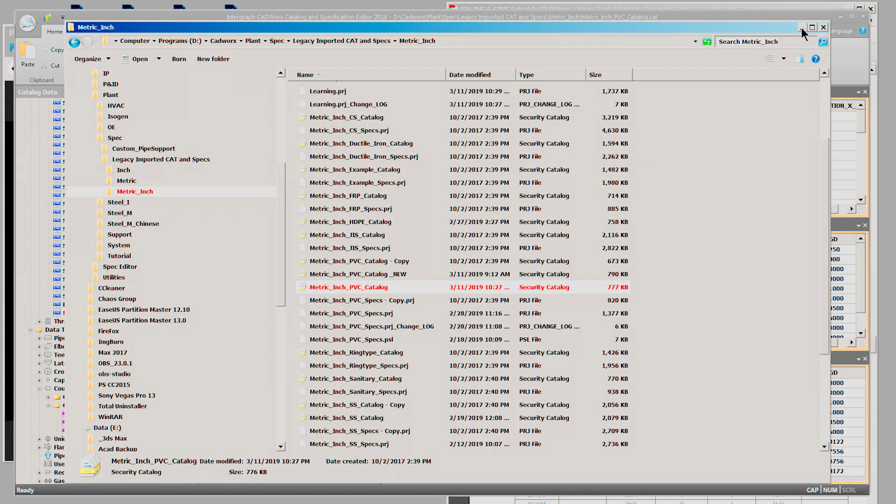Now, what makes this fitting so difficult is you have a start point for the main going one way, you have a start point for the reduction going another way, and between those two start points you have an overlap of pipe.

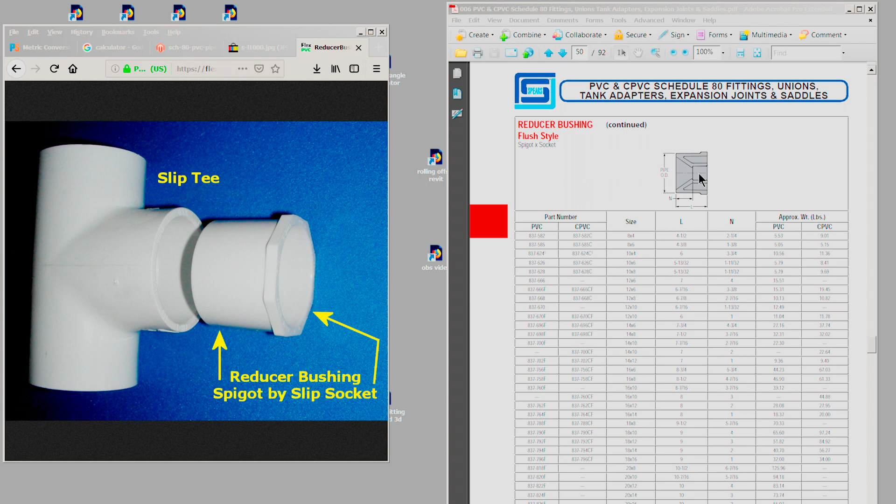Now it works in the model, but when it comes to producing a plot for isogen, you get an overlap pipe error and the plot file comes out all boogered up. So the way we overcome that is by not overlapping the two pipes. I have a small space there.

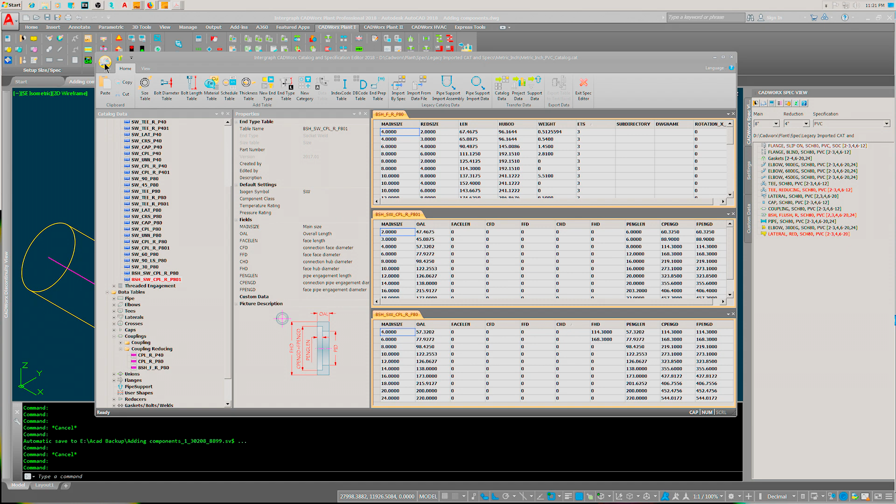So to get started, you open up the files you just made, and you go into the data tables. I use the reducer bushing, copy it, and down here, rename. Now you'll notice the reducer bushing, or the coupler, has two end types. So we're going to take those two end types, one for the main start, one for the reduction, and go up and take those data tables and do the same thing, copy and rename, copy and rename.

When you open up your copied file, you're going to get the original data. Stock Windows commands, pick the top one, hold shift, and remove. To add lines or sizes, right click at the bottom, add size, go through and pick out your sizes. Same with the end type styles.

I've done a diagram to show what to put in these fields to get this fitting to work. Once you've filled in all of the data fields here, you're going to save it and then open up your project spec file.

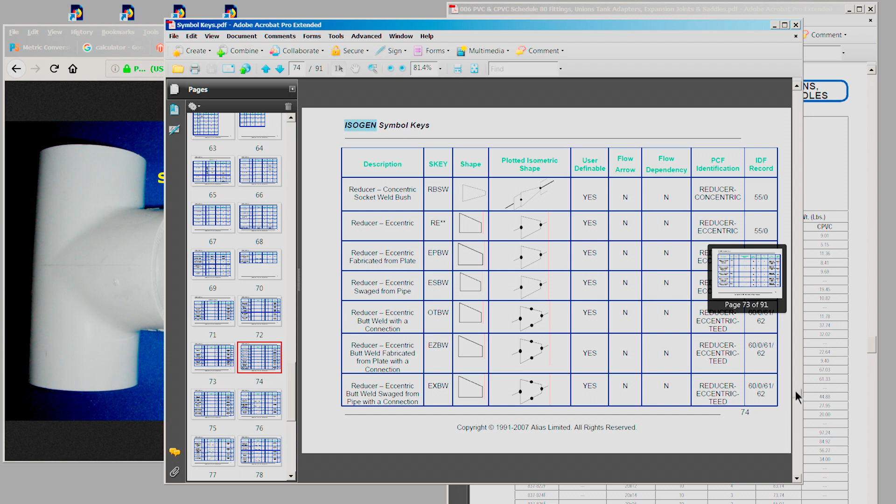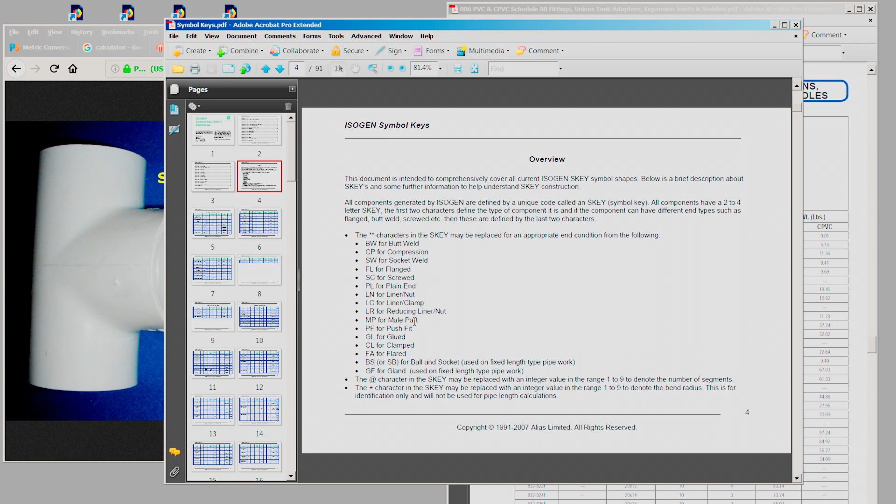On the reducer size, on the end type sizes, I want to bring to your attention, this is the main size. It is not a socket weld. It is a male part. Okay, so that's for the large size, the main size.

The reduction size is a socket weld part. You want to make sure you get those so that your isogen, your symbol, looks like it's supposed to.

Anyway, once we filled all these in, I'm going to fill a data field in here so I can save it out. These data fields have no effect on our part, but it does give me a save.

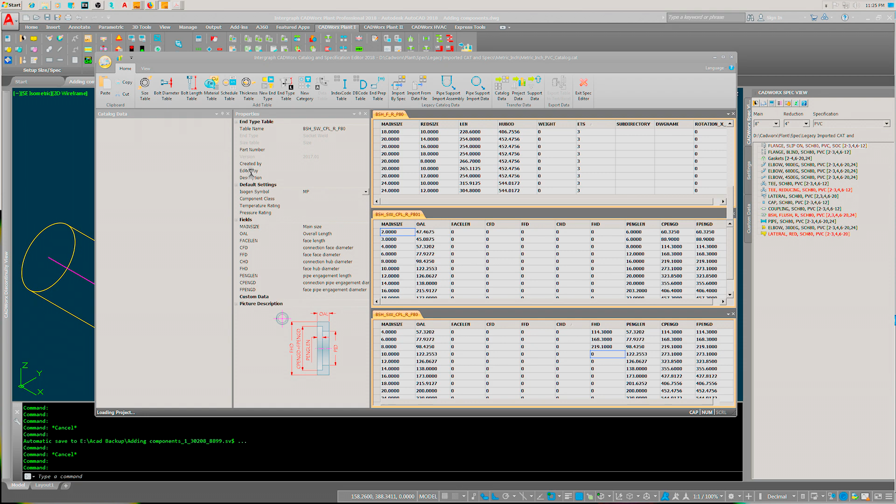So now when I go open the project spec, because I've made changes, it's going to ask me if I want to update the project. Yes.

Now when you first create the fitting, it's going to be under couplings. It's not going to be there. You're going to have to add it. Right click, add, and you come down here and you fill in the fields.

And your data table, that's the one you created for the fitting. Your sizes, if they're not there, go over here and you can select your sizes. And on a side note, I could find no 22-inch Schedule 80 PVC in my research.

Got to do the same for your end types, start and finish. And you notice the isogen symbol there, isogen data that we took from the PDF file.

Add your long and short description. I just kind of copied the format they had for the couplings. And then you've got to hit add and your part will appear.

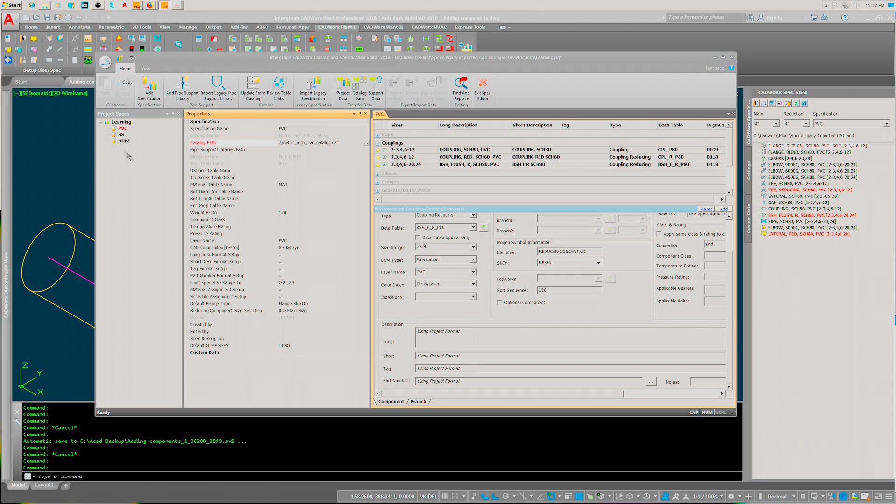When you get all that done, you save it. And then you have to reload it over here, right?

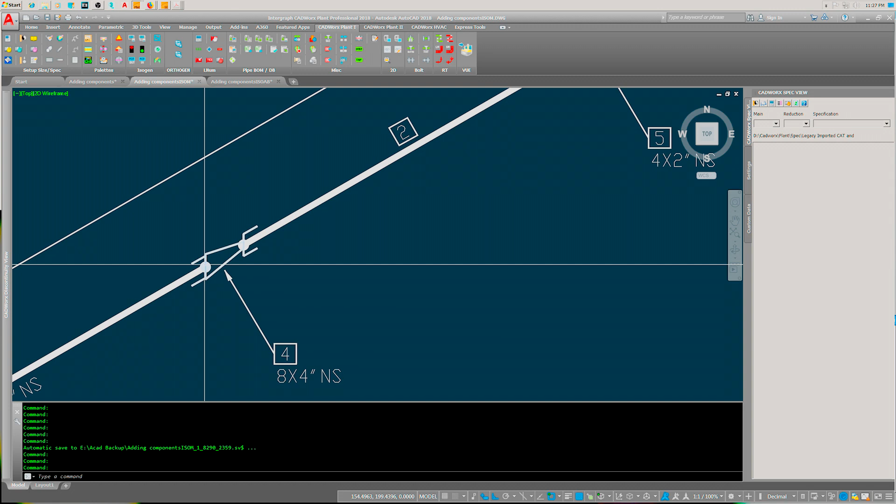Let me show you. This is that fitting done with a socket weld for the main size or the start connection. This is a male part, and this is what we have.

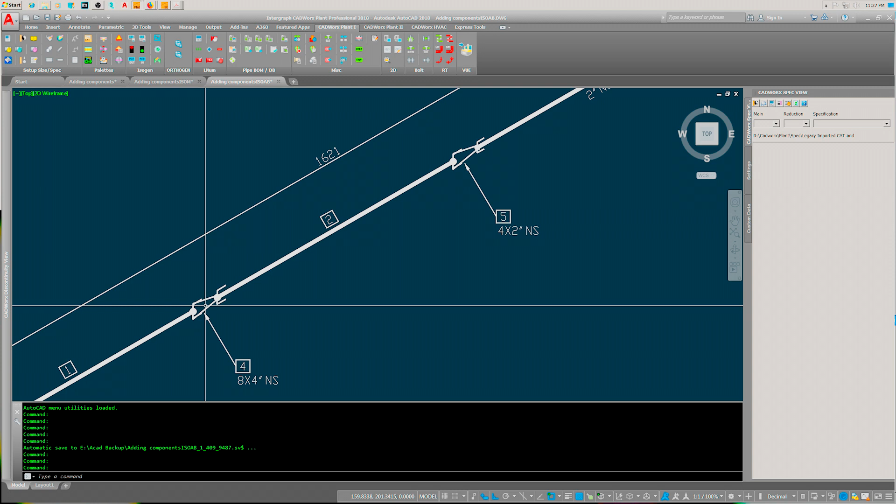We have a bushing fitting inside our main pipe size. That's why it's important to make sure you catch that in the isogen portion of these.

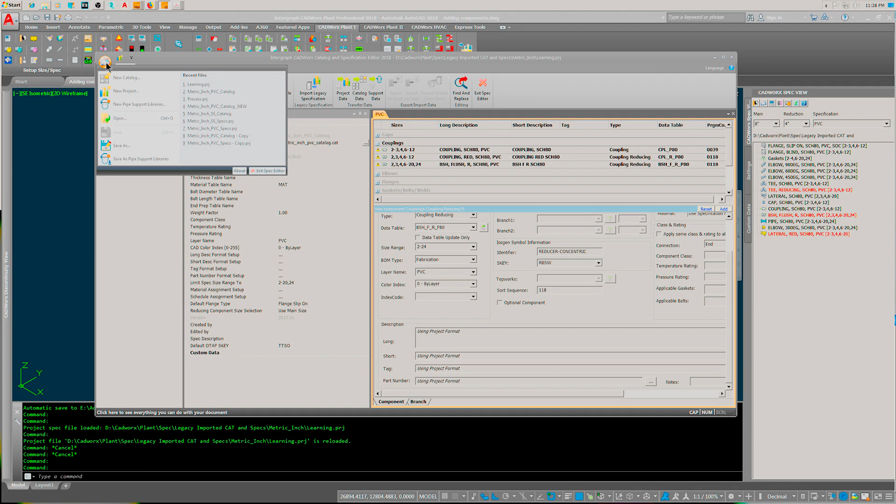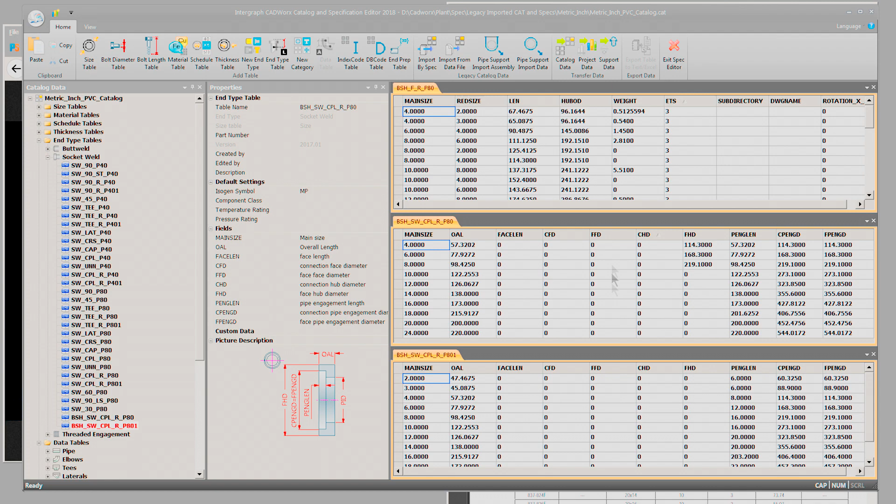And that pretty much covers just a cursory view of the spec editor. And instead of me trying to explain what goes in each of these fields for these different data tables, what I did was create this diagram with an explanation of what goes in each field and where to get that information.

One thing I want to point out is pipe dimensions. Cadworx lists the inside diameter as the nominal diameter, or the nominal diameter as the inside diameter. But as you can see here, that is not the case. And where it begins to make some significance is in 14 above. The nominal is the OD, and the inside diameter is considerably smaller.

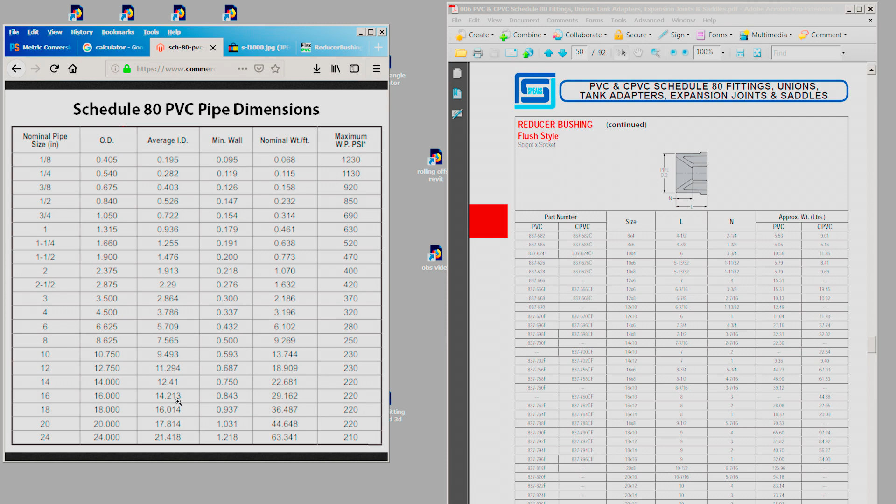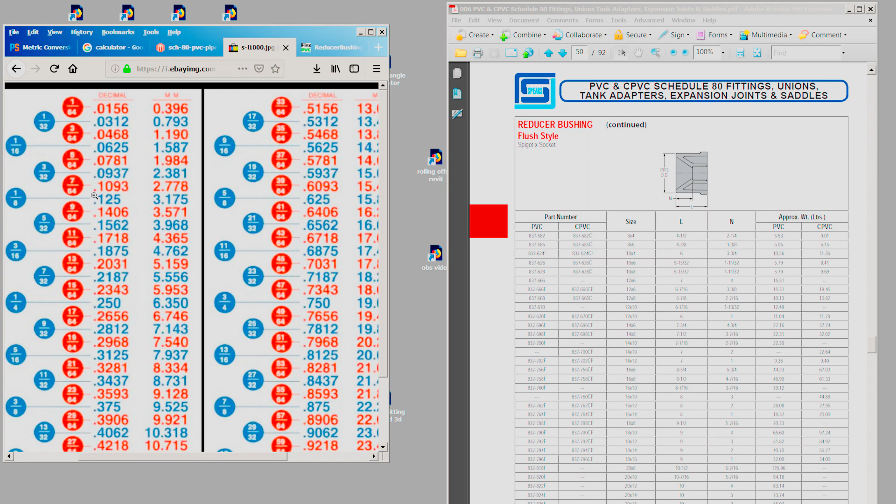Now, it may work in all of the other applications, but for this application, you're going to want to use the average inside diameter for the nominal size of the pipe when you start filling in these data fields. This might also be kind of handy, it converts fractions to decimals, and yeah, that's about it.

I also looked at, since it is technically a reducer, using a reducer and a reducer bushing, and what I did is I took the reducer bushing from another spec. I believe it was stainless steel, but they're all the same. Anyway, there just wasn't enough data in here.

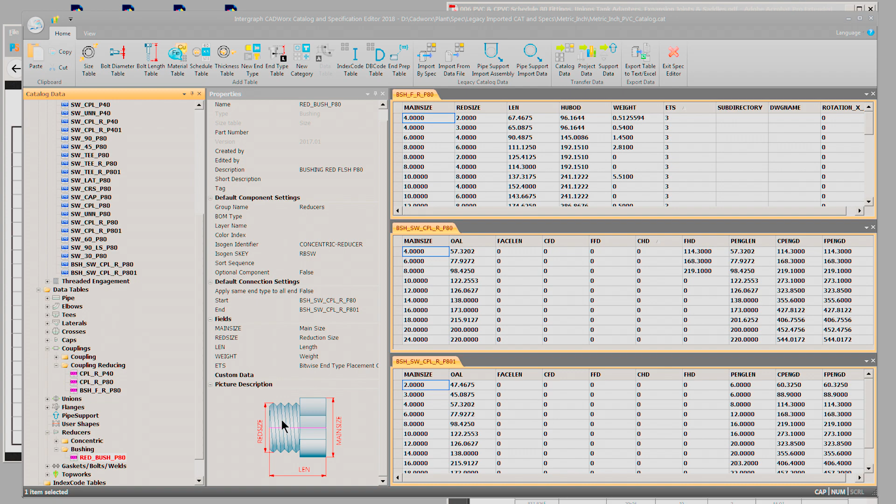As there is in here, to make the fitting work, so that you got a fitting that had a spigot end and a socket end. Anyway, I think what I've got here is self-explanatory.

This dimension is the only one that's kind of tricky. This dimension and this dimension are accurate, and this outside dimension is accurate. Couldn't figure out how to get a lip on it though.

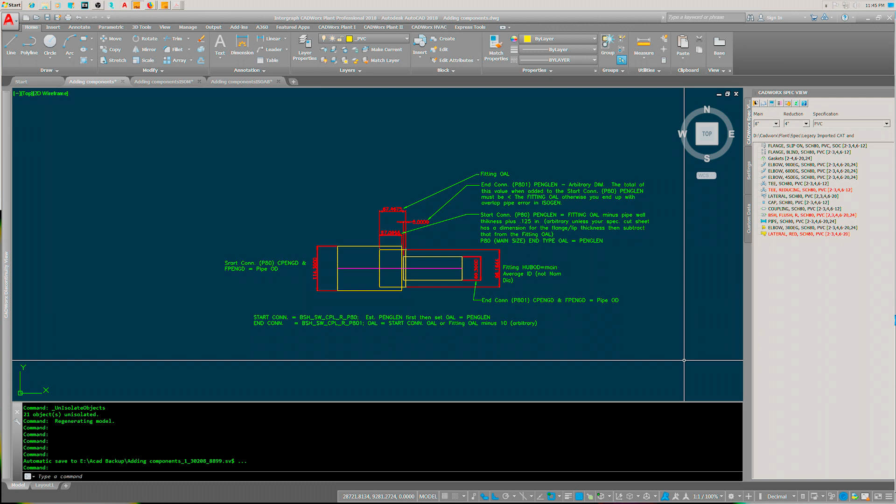This number, when added to this number, has to be less than that number. That's so you don't get an overlap in here. All right, there it is. Hope this helps.